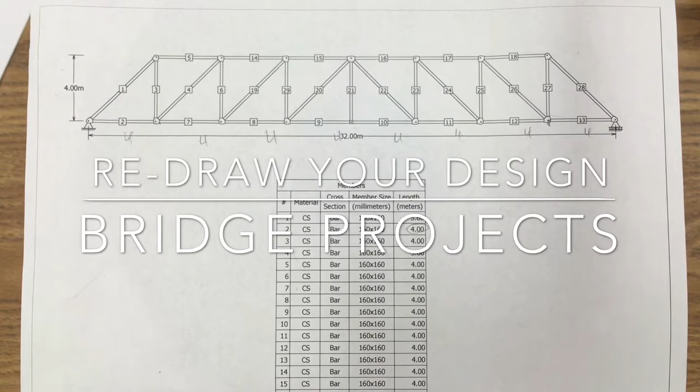Welcome to this tutorial on getting started with redrawing your bridge design so that you have a template to actually build your model on. The printout that you have from the West Point Bridge Designer software is what your model is going to be, but it's not the correct size. So we have to redraw it so that we can work from the actual size design that we're going to be making our bridge.

We're going to use a very easy way to convert our units here so we can make our bridge the right size. If you look right here at member lengths, all of the lengths we see are in meters. Our member number 1, which we can find right here because it's labeled with the number 1, is 5.66 meters. What we're going to do very easily is say if 5.66 meters is the actual length, the scale length we're going to use, we're just going to say that's centimeters.

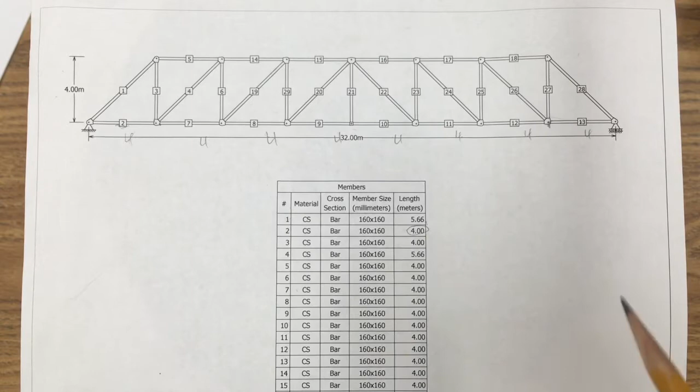So instead of meters, we're going to say it's 5.66 centimeters. The one down below, number 2, which is right here, that's 4 meters, or in our conversion, it's going to be 4 centimeters. So that's how we're going to tell how long to make everything.

We also get a height over here, which will be helpful for us when we're redrawing as well, because you can see we have straight lines, we have perpendicular lines, and we have lines that go at an angle. We should be able to do this redrawing without having to pull out a protractor or anything like that and try to figure out the angles.

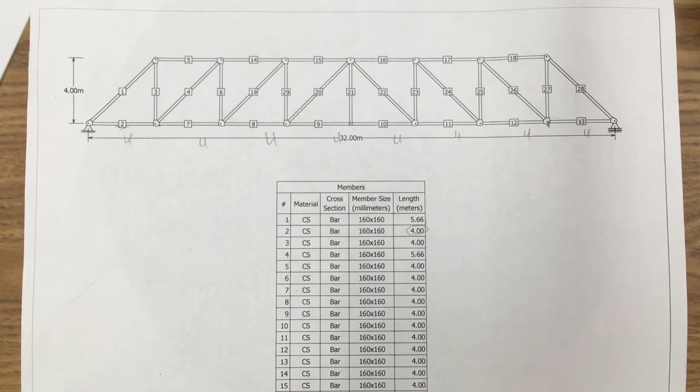To redraw our bridge to the correct scale, we are going to have to use a legal size sheet of paper, which is a little bit longer than a standard size sheet of paper. It's actually 14 inches long, which will allow us to get our full bridge in there at the correct size.

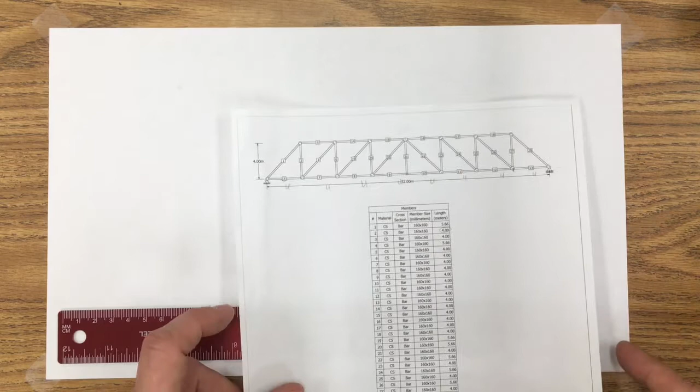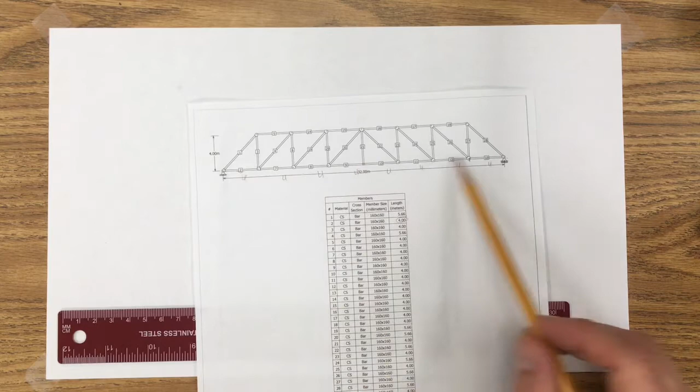So let's bring this back out a little bit. If we start with our very bottom line, I would suggest starting with any straight lines horizontally on your bridge, and figuring out the total length. All of our bridges from end to end should be, if you did the correct elevation when you were designing it, 32 meters, or in our conversion, 32 centimeters long. So let's start by drawing this very bottom line here at 32 centimeters long.

So if you can see on my ruler here, it only goes to 30, really 30.5 centimeters. So it's not long enough, but that's easy enough to fix. I'm going to go from here and make a mark to show this is my starting point, and draw a straight line all the way to 30.

Then I'm going to put my ruler down and line it up along my line so I can tell that the extension I'm going to make is in a straight line with the line I already have. So I'm lining it up, and I'm just going to extend it another 2 centimeters to make 32, and make a little line there.

So now I have the total length of my bridge. This is going to be the actual length of your model.

The next step I want to do is to draw this top line here. It's also a straight line, going to be not quite as long as our bottom line, and we need to know it's going to be centered, but we need to know exactly where to start it so that we can draw it in the correct relationship to our bottom line. We can do this without using a protractor.

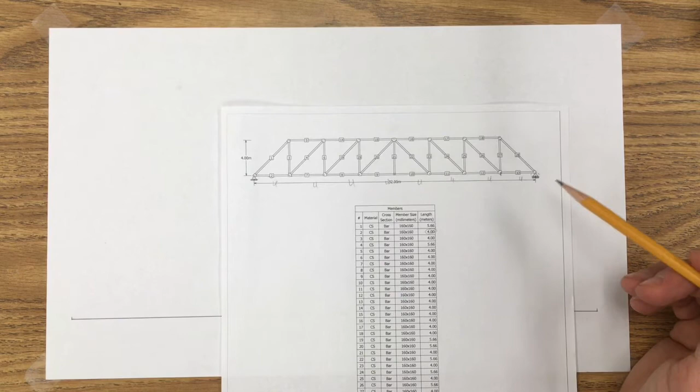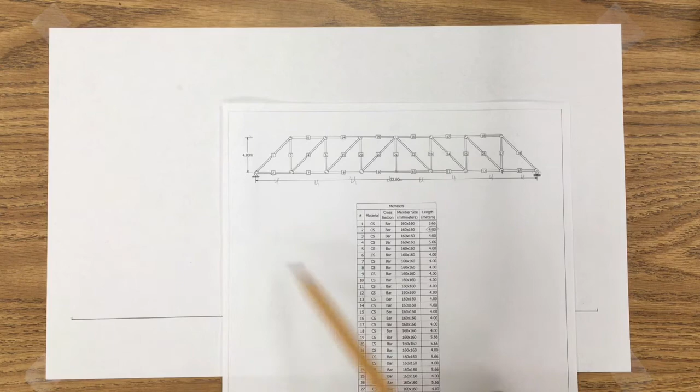Now we know it's 4 centimeters, going to be 4 centimeters high. So we can start by measuring that distance so we know where to draw our line along the top. I'm going to turn my ruler this way, so that it's perpendicular, or like a cross, from my bottom line.

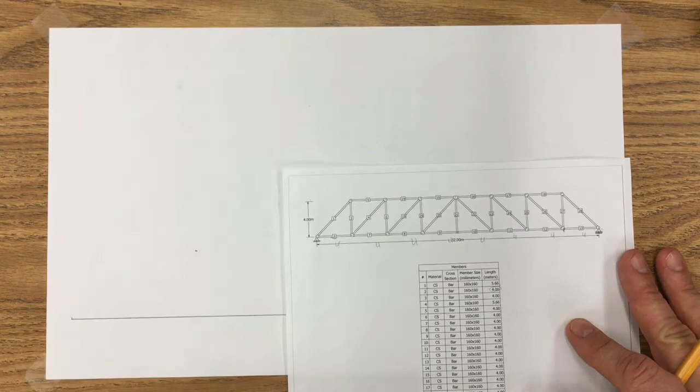I'm going to line it up right at 0 here and make a mark right at 4 centimeters. Then I'm going to move my ruler down a little ways, make sure it's still on 0, and make a mark at 4 centimeters. So I know these 2 dots I just made are 4 centimeters above this bottom line, which is what I want. Now I need to figure out where to start this line, so let's look back at our model that we have.

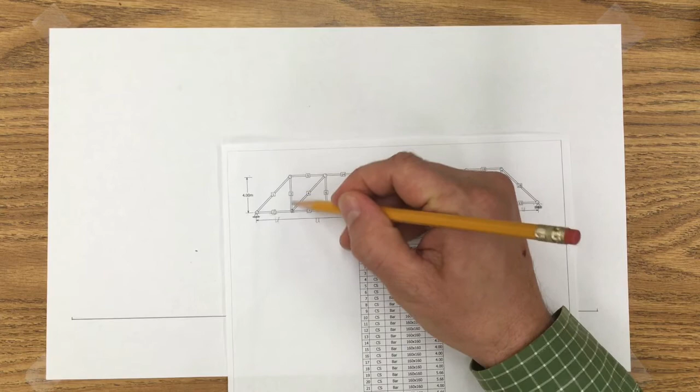So I know that number 2, this member, is 4 centimeters long. This place right here, or this member, number 3, also, just to confirm, is 4 centimeters as well. It goes straight up and down, so that makes this angle a 90-degree angle.

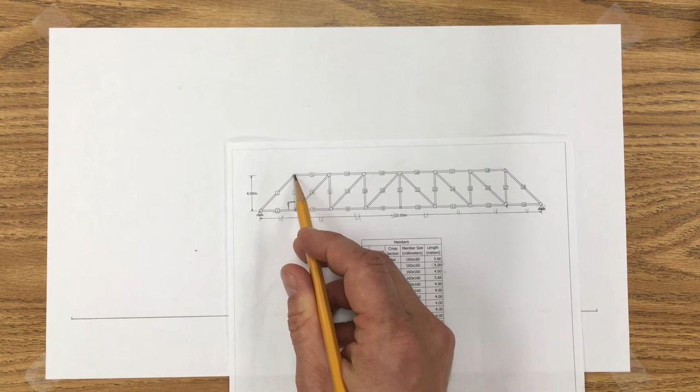So I know that if I measure from my very end all the way in to this joint, that's going to be 4 centimeters, and I can measure straight up from there another 4 centimeters to find this point. I know this is the point I need to start my line to draw it across.

Your bridge is going to be a little different. I'm just taking you through this one, but you can use the same techniques to figure out how to draw your bridge as well.

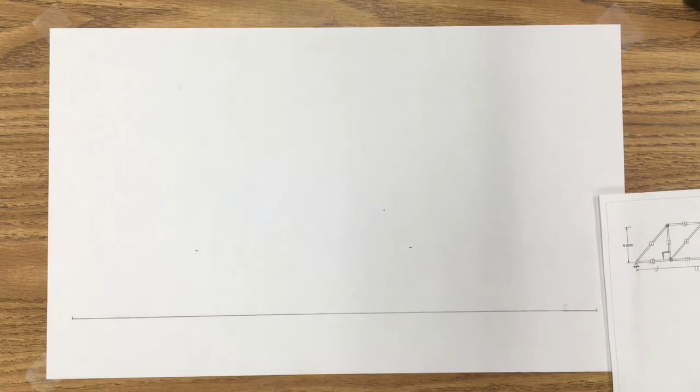Now I'm going to use a note card to help me draw a perpendicular line. First I need to measure. Right at 0, right where my line starts, I'm going to make a mark at 4 centimeters.

Now I can use a note card, and there's plenty of them around the room. Line that up right there. I know a note card is also a 90-degree angle at the corner, and I can draw a straight line up right where I made my 4 centimeter mark. Now, if I line my ruler up with this line and that line, I know that corner of my model is going to be right there.

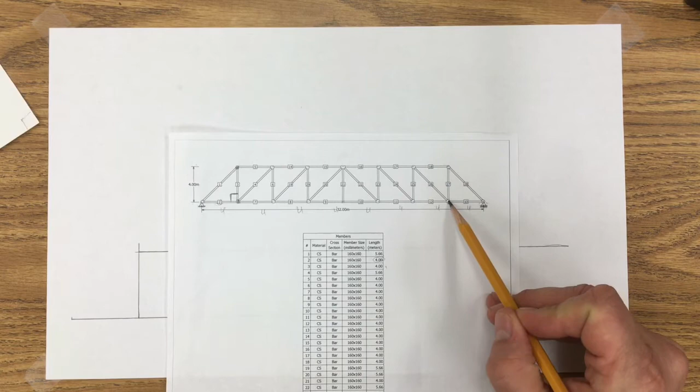I can do the very same thing from this side. So if I measure in 4 centimeters, I know this point is exactly 4 centimeters above that. So I'm going to put my ruler on 4 here and measure backwards to 0 and make a mark right there.

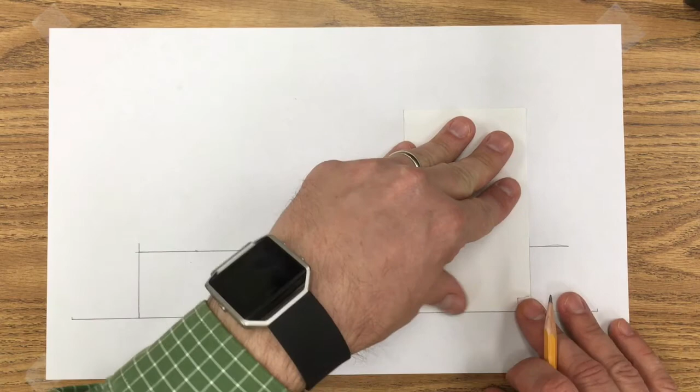Again, using my note card, I know that it is at a 90-degree angle at the corner. Line that up right on the line, and then draw my line straight up and down. So now I have this point and this point.

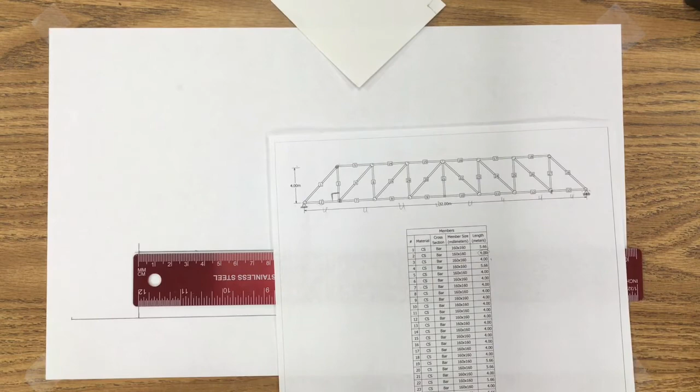And if I measure, that should be, from here to here, if I take 32 minus the 4 here and minus the 4 there, then I can get to 24. And if I measure this, this line is exactly 24 centimeters from here to here.

Now, once you have the basic structure down, you have your top line and your bottom line, everything else falls into place pretty easily. For instance, I know...

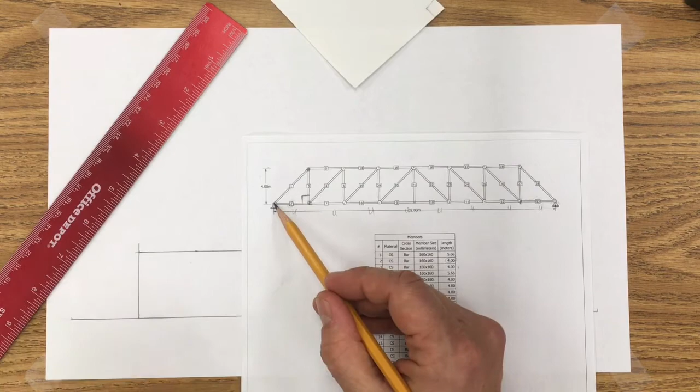That this line goes from this point, the very end point, to the end point of the top line. So I can come right over here, place my ruler up here. Don't even need to measure, as long as I line those 2 points up, I can draw that angle. Same thing on this side. I know that this line is going to go from this point to my end point there.

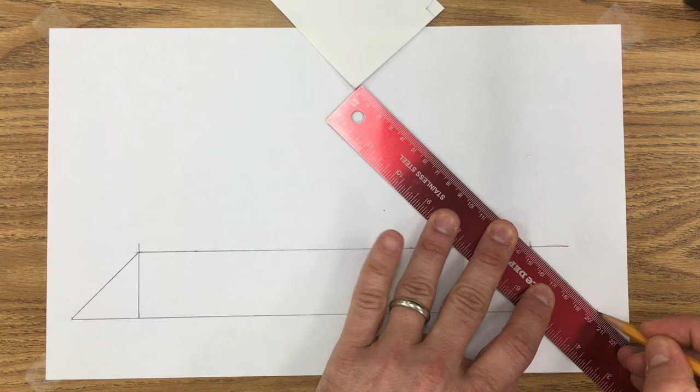Now, I just need to make measurements, and you'll have to see what your measurements come out to be. But mine are going to be every 4 centimeters all the way across, on top and on bottom. I know I'm going to have one that goes up and down and one that goes diagonally, so I'm just going to do that.

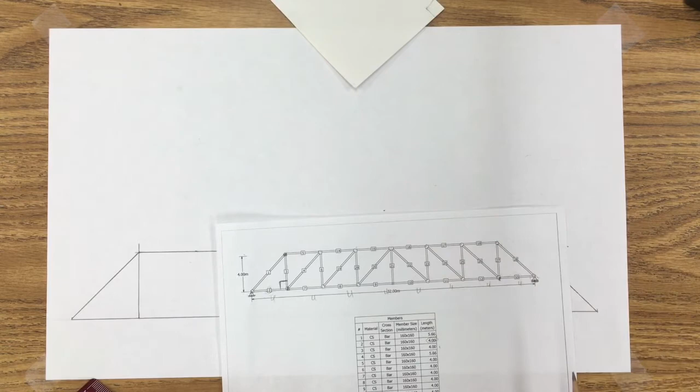I'm going to quickly measure across and make a mark: 4, 8, 12, 16, 20, and 24 is already there.

Same thing up at the top line: 4, 8, 12, 16, 20, and 24 is already there.

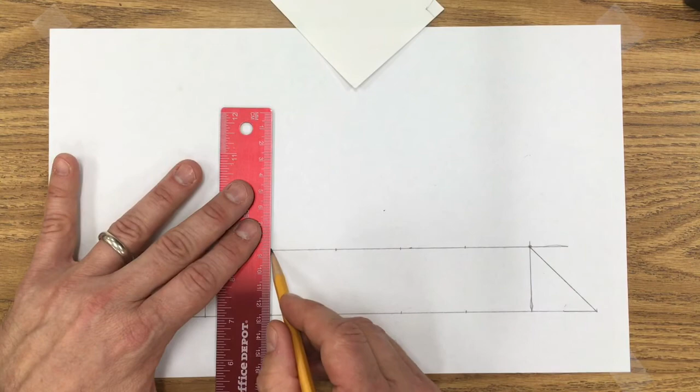So now I'm going to have a straight up and down line right there, and all the way across. Then I can look at my model to make sure I'm drawing the diagonal in the right direction. I know it's going this direction, and it's just going to go from this point to that point. I don't even have to measure it because I know I've done all the other measurements correctly, so all I need to do is draw the line.

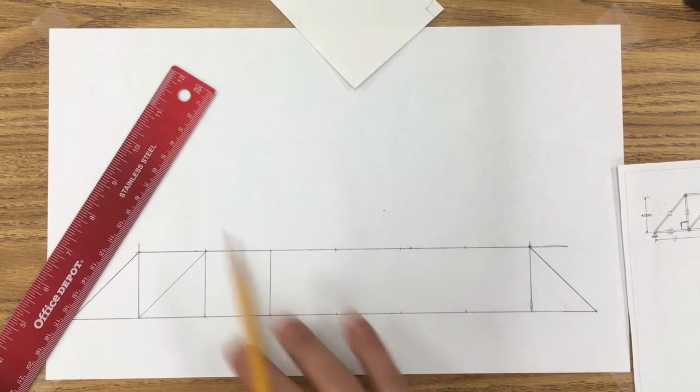And I can go across drawing my perpendicular lines, the vertical lines going straight up and down, and the diagonal lines all the way across there. You're going to work on your drawing just the same way until you have completed redrawing your model to scale, or to the scale you're actually going to build your model. So I'm going to use this as the template for my model, and I'll show you how to do that in the next video.